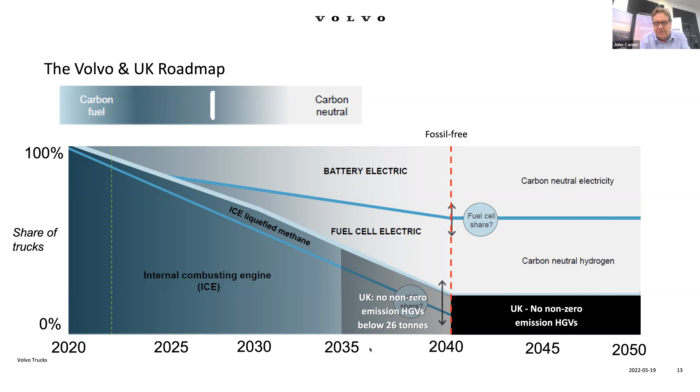Obviously, battery electric is available now. We are moving to heavy duty battery electric. In 2025, we will have fuel cell electric. But again, the key element there is where the carbon is with regards to the fuel.

James also hit on the subject of the cut-off dates. For us as a vehicle manufacturer, the cut-off in weights is not the key issue. The cut-off in weight is really about the segment. So today our offer is very much focused on back to base, short cycle, refuse and distribution. And the other element within 26 tonne, with regards to the consultation, there is a consultation to discuss the segments that cannot be achieved easily. So for example, dangerous goods and ADR, there's a little bit of debate starting on that now.

The other key element for us is trucks are not just about freight. 30% of what we sell are service vehicles. So they're there to provide a service, so they need power on the move. And that's a key element in terms of a truck's operation. How do we manage a truck that's there to provide a pumping service, a fire engine, a gully sucker, a road sweeper, that have precious demands for chassis space as well as energy.

And again, the good news for us is from this month, we will be out there with the order book open for long haul electric vehicles, with production starting in week 37 this year.

Yes, we fully welcome the £200 million boost to this sector. James touched on the incentives. The incentives are where incentives exist in markets, the uptake for electric vehicles has grown. Again, we saw it with the bus market in 2009 with a very good incentive. The bus market transitioned very quickly, but they often say freight doesn't buy a return ticket, but then internet shopping came on board. So we buy the goods and then we see if they fit and then we send them back again. But this is a really important section for us.

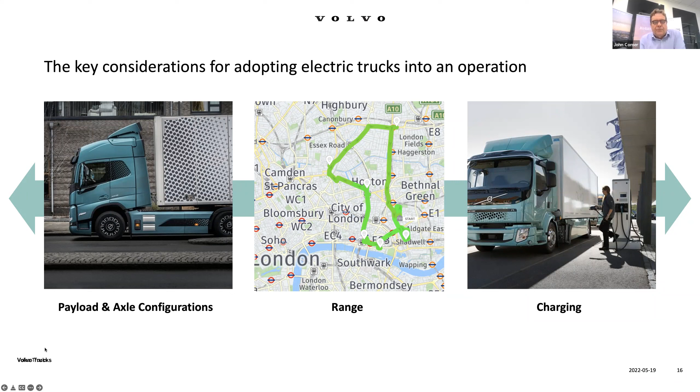So the key element then for us was obviously finding in the response last Thursday the discussion that there will be 2 tons available for zero emission vehicles for the vehicles described in the consultation document. But from a commercial side, we need a much bigger statement than this. We need some drawn out directives about what that really means. So, you know, 2 tons, yes, it's great. We've only got 1.5 ton on 2-axle and 1 ton on 3-axle vehicles today.

So what this really means to us and our operators is crucial to ensure that commercially this sector really now moves. Yes, there is a bit of disappointment that we're restricted to 44 tons. We still believe as a Swedish truck manufacturer that there is so much more to be gained out of higher payloads, and that could be easily achieved today in the first level of decarbonisation, with diesel trucks running on HVO, running at higher weights, on green corridors, at night, servicing the pallet network, which would also complement and support the driver shortage.

So we have a range up and running, the FL and FE, that's primarily short haul and distribution. Yes, these 2 trucks, particularly a 3-axle and 2-axle, can benefit from the 2 ton additional payload.

And it was really good to go and see the factory for the first time where these vehicles were built yesterday. So it's quite amazing to see an electric vehicle going down the same line as a diesel vehicle and even a gas CNG vehicle. So again, in terms of integration, it is moving, and it is moving into this project. And the aim of that particular factory is around about 2,000 BEVs in the current year. So fascinating to see how the integration is working within the line.

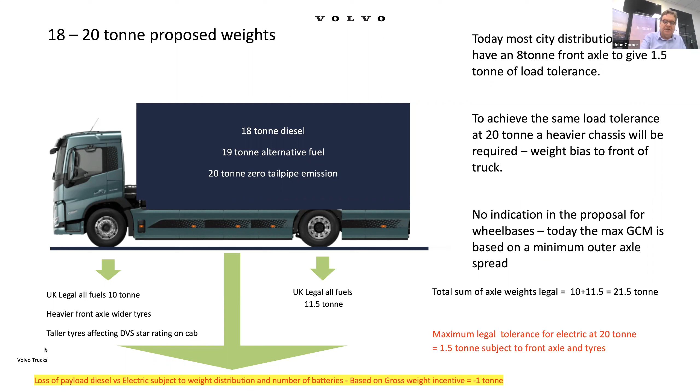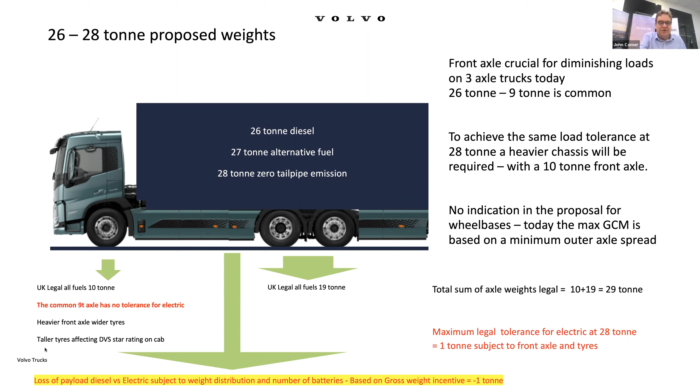If we look at 26 going to 28, we definitely need a 10-ton front axle. Today we do 9 tons, but 9 and 19 takes you bang on 28 tons. So we need to have load flexibility there with regards to the operation of the vehicle, particularly a fridge vehicle with a diminishing load. And then for the construction truck, we completely transition the type of vehicle we run today.

Where we have the balance of 2 tons, 2 axles on the front and 2 at the back, we go to a tridem solution to get the energy on board the vehicle. And even today, under a diesel regime, we have a slight difference in load tolerance based on the legal demands for the bogie. So if we go to 34 ton on a tridem, then we've got no loading tolerance at all. So we've got 24 ton legally allowed on the rear, 10 ton on the front, and this is a key sector for construction.

This is probably the most important one when it comes to payload. There are no pallets on a tipper, there's no pallets on a tanker. This is all about productivity. So the question from the operator would be, why would I want to transition to this today when I get no physical benefit? In fact, my efficiency drops and my service level drops.

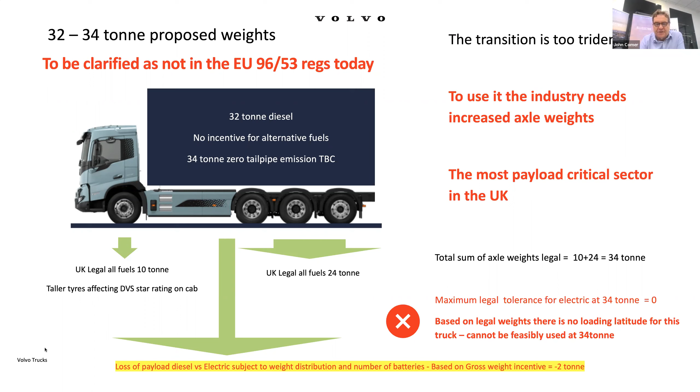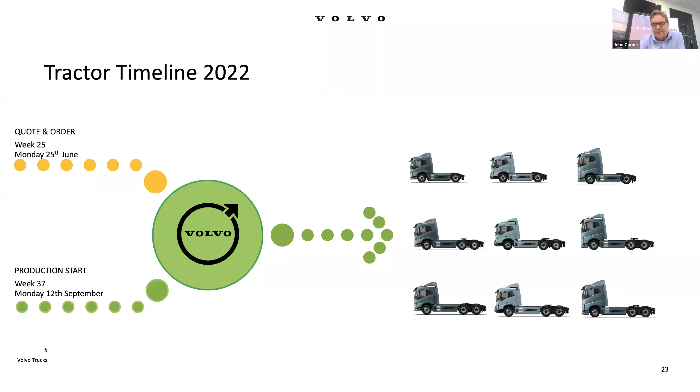So movement with regards to the axle weights is key also to this transition. Heavy tractors, yes, they're available now, and they will be in production in week 37. We'll have 4x2, 6x2, and 6x4.

They will have a 3-motor system developing 490 kilowatts, but being a traditional diesel man, I like horses. 666 horses, that really is the number of the beasts.

And again, the other thing to drive the vehicle and deliver the tractive effort, we will be using a 12-speed gearbox, and we will also be using energy-saving features that we've developed on the diesel range, such as predictive cruise control in the form of I-See.

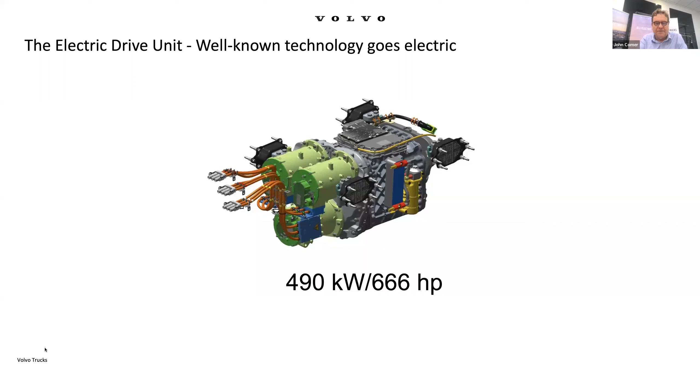Talking about the batteries and the density, when we look at the chassis, we are hungry for space. The batteries take up the sides of the chassis, and where we had the components on the chassis before, where we think that we could lower the cab, we can't, because the unit where the engine sat is now known as the MOOC, which is basically the module under the cab. So all those components are placed in that area.

The other key thing we have to bear in mind is the weight distribution changes. Typically a 4x2 tractor weighs 7.5 ton. These vehicles will weigh 10, and the battery focus moves towards the drive axle. So today unladen, they're 2 ton, they move to 4.

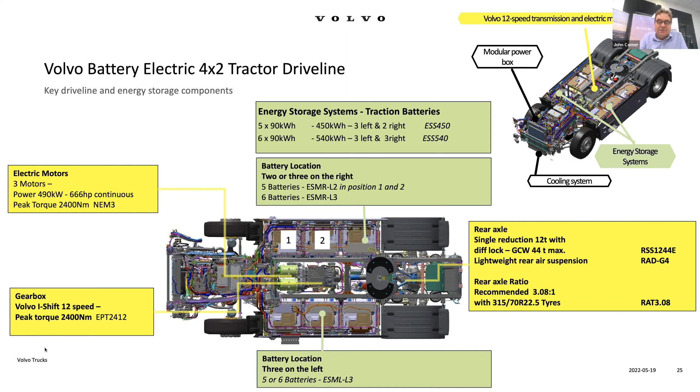So this is a key part, as well as the range and the charging, in terms of this total consultation with our customer base. Working back to the note that was made last Thursday, what we would really welcome, and we're pleased to see, is maybe we move the 40 ton to 42 ton, but we also need to consider the tractor unit to make sure that moves from 18 to 20 ton, to allow us to work the distribution system that exists today.

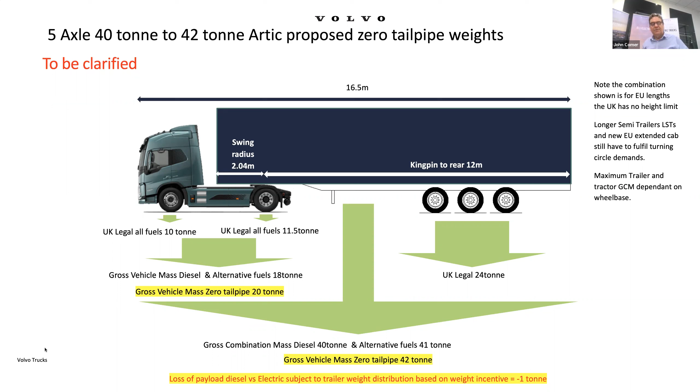There's around about 240,000 semi-trailers already in the business, and they're not going to change. So we need to make sure that we're able to flex with that.

And then when it comes to 44 ton, which is the biggest segment in the UK, around about 50% of what is sold annually, the architecture for the vehicle currently does not work within the legal framework for length.

So with regards to energy density, we have to go to a tag design with a very long wheelbase, and so we end up over length. We have no payload advantage in the regulation, and at this moment in time, our drive line is designed towards a 44 ton maximum.

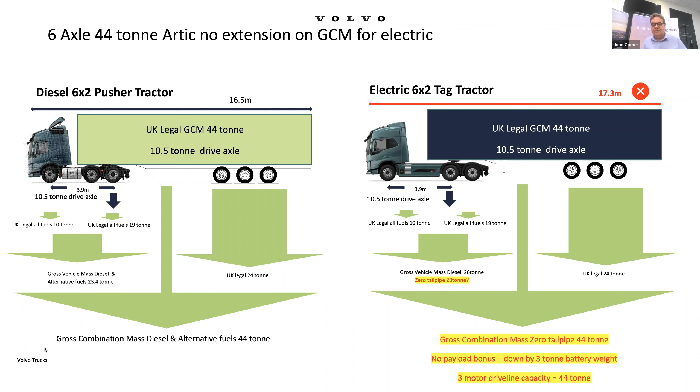So the solution that we're working towards is maybe moving back to a 42 ton combination with a 300 kilometer range, to work this into the current distribution systems that already are out there today.

And range is key, and Sandor will probably cover all the key elements that we want to know about charging, but understanding range is crucial.

So with regards to the sales office, we will look at the range. From the customer office, we will have the ability to look at the range in the office. The driver will have an app that looks at the range and other functions on the vehicle, and the vehicle will have a navigation system that also gives and reinforces the data with regards to energy for the vehicle.

And again, obviously, we're going to get very efficient drivers. Today, a driver can drive the vehicle and look at the fuel consumption after the event. If the driver drives the vehicle hard today, he might not get home. So it's a different way of looking and managing energy, but we're managing energy before the event rather than after the event.

And to get that energy on board within the heavy tractor, it has a 43 kilowatt wall-mounted AC charger, which would charge within 10 hours.

But to get the distribution system working, and Sandor would develop on this, currently with 250 kilowatts on board, to get 80% of the energy into the vehicle will take an hour 25. And obviously, as the battery fills, the ability for it to take on more slows down.

And then the other key element is where is the charging unit on the tractor unit? Because these vehicles are 16.5 meters long. We've got depots, we've got one-way systems.

So if we're going to design and work with Sandor, we need to understand where the connection is, which is on the right side behind the cab on our particular vehicle. It might be different elsewhere, because today on a fuel tank, we can obviously swap sides, or we can swap with AdBlue, or we can even fit a longer hose.

But understanding even the basic thing where charging is a real key part of the consultation with the customer, to work together in collaboration, not only with the legislation, the operation, the infrastructure, but of course the driver who will make this work.

One of the things about DC charging, it's a fantastic opportunity to help promote drivers. Obviously during COVID, they were haulage heroes. Now the facilities are still not up to scratch. But when we build a charging station that allows time for DC charging, we really need to consider the facilities that are available, to maybe grow and develop this as a career with our future generation of truck drivers.

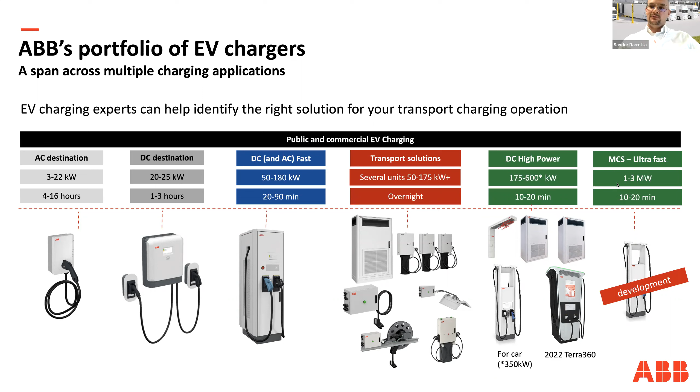We're also involved with high power charging, like DC charging, where we have distributed and all-in-one systems. Together with our team in Delft, the Netherlands, we are working on MCS fast charging, which will be from 1 to 3 megawatts.

But to switch from ICE to e-truck, it's not just putting one charger, and that's easy — that's the easy part. Things become difficult when changing your entire fleet to e-trucks. That's why I'm going to tell you something about how we divided transport.

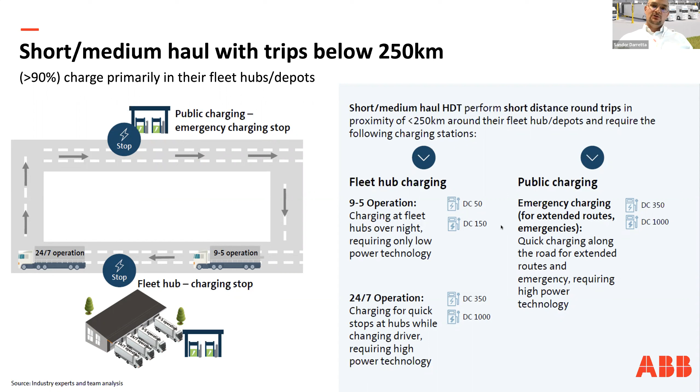And when you need higher power, things like energy management all come into place, and that's where we advise you. There we have a power range of 350 kilowatts, but also possibly going to the megawatt, and we use emergency charging at public charging stations. So 90% of all charges will be at the depot.

This gives you an impression of how the depot could look like. As mentioned before, you can have an inlet on one side or the other, but how do you choose the appropriate charging infrastructure with a mixed fleet, and considering the length of the vehicles — does it have a trailer or not? That's really depending on your infrastructure.

There we have a solution with our depot boxes. It's an overhanging construction with cable management, which you can easily connect to your truck. You can also allow others to charge at your facility, because that optimizes your return of investment, since you make an investment in charging infrastructure for a longer period of time.

But how do you return your investment? That's a real challenging topic, and there we can advise you, because by setting up a location like this, then it all comes into place.

What's the grid connection? We also have dynamic routing, because transport is planned to the minute. So how do I charge my vehicles with my limited grid connection? But also related to pricing, we have pricing of energy. Maybe we should store the energy.

Now I'm going to the long-haul trucks, so the 500 miles and up. There, I see they will charge at the depot, but their public charging really comes into place, and that's also where megawatt charging will come into place. Because during the mandatory 45 minutes of rest, you would really like to charge to drive another 4.5 hours, also due to European law. So they will charge en route at public charging, and then charge again at their destination or depot.

ABB is involved with megawatt charging, so megawatt charging will really be the enabler for long-haul transport. Because currently we have our CCS, which can charge up to 350 kilowatts, but we are working together with OEMs and other companies to develop the megawatt charging standard, which can deliver up to 3 megawatts. That means you could charge your truck within 6 minutes when you talk about 3 megawatts.

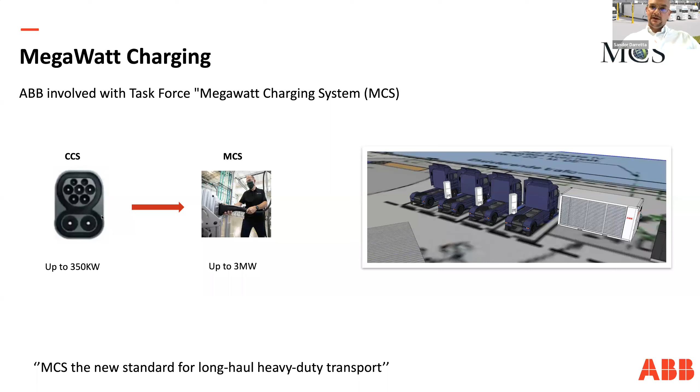It's making a huge difference, but it also involves challenges like energy capacity, heat, where the location of the connector will be, how long the cable should be - all technical things, but also on the commercial side of things. That's why we are currently developing the megawatt charging, and we already have some nice projects running, which I will show later. But this is an example of how the site of the future could look like.

On top, we have the megawatt charging when the trucks come in, fast charging, and then proceed their way. Below, we have 175 up to 350 kilowatt CCS charging, where it's semi-fast. On the right, we have overnight charging - truck parkings where you have the time to charge. This is also a very important segment for long-haul trucking, and that's why it's really the best way to charge your truck.

I also want to give you some examples of projects that we are running. That's the E-Charge project in Sweden. This is really about long-haul trucking. That means we have an MCS project where you have 4.5 hours of driving, 45 minutes of charging time, and then drive another 4.5 hours. That's a typical use case for long-haul transport. This project is being deployed around 2023, 2024, so it's quite fast already.

So that's what I want to tell you - that we are not only working on it, but we are actually doing it together with our OEMs. Together with Volvo, we're doing this project in Sweden. If you would like more information about this project, you can contact me.

Not only Sweden, but we also have similar projects running in Germany and eventually also in the UK. So if you're interested in megawatt charging, please reach out to me or our local team in the UK.